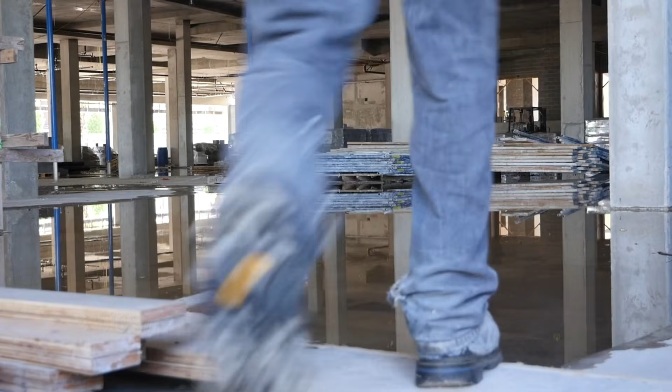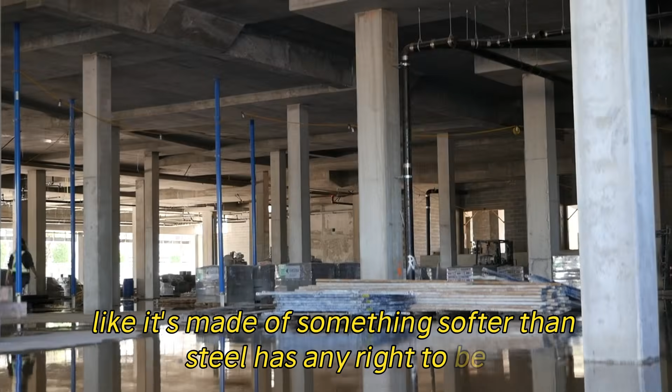8 a.m. A construction worker on the 21st floor looks up. A steel column, thick as a person, rated to hold thousands of tons, is bending sideways. Not cracking. Bending. Like it's made of something softer than steel has any right to be. He doesn't stay to find out what happens next.

Nobody does. Within the hour, a 37-story tower in the middle of Manhattan is empty. Then the block around it. Then the block after that. By nightfall, 7 other buildings are evacuated. A 5-block frozen zone is locked down. And the city's fire commissioner is standing in front of cameras, saying the building has been determined to be unstable.

This tower used to be Pfizer's global headquarters. By July 7, 2026, it was something else. A live test of exactly how much weight a piece of steel can silently absorb before it gives up.

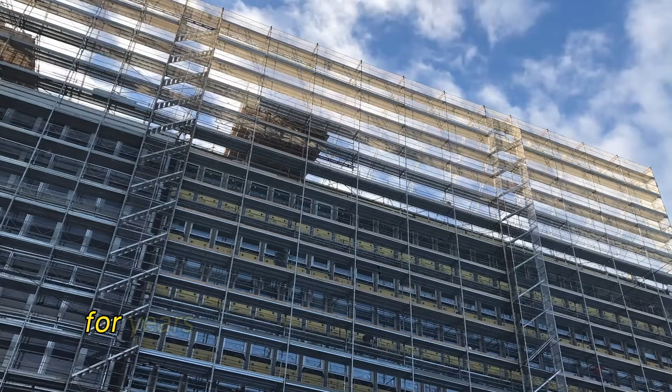235 East 42nd Street wasn't built to fail. It wasn't even built to be housing. Raised in 1960, designed in clean international style lines, it spent decades as office space, for years the corporate nerve center for Pfizer, until the company moved to the Spiral in Hudson Yards in 2022. Then the tower sat there.

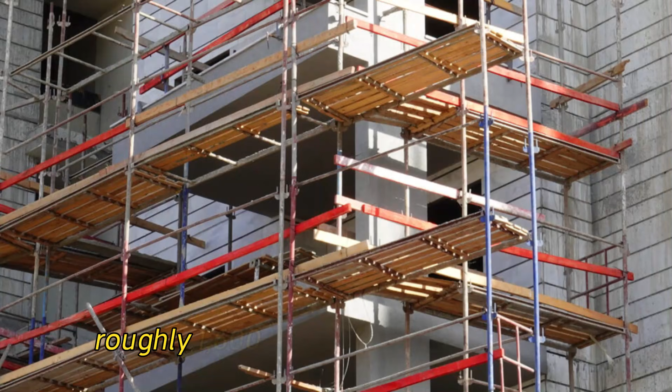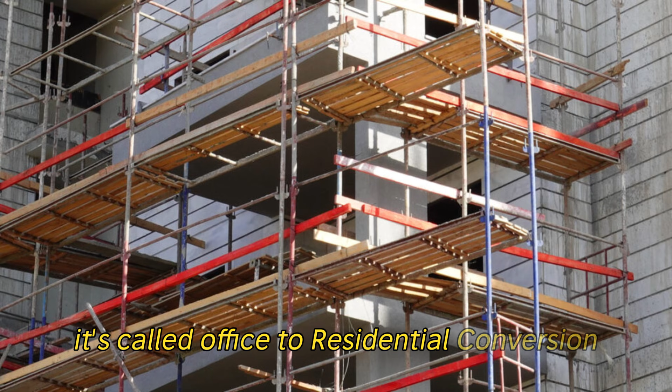And New York, sitting on a housing crisis it can't build its way out of fast enough, looked at an empty office block and saw something else. Roughly 1,600 luxury rental apartments, part of what its developer calls New York City's largest office-to-residential conversion to date. It's called office-to-residential conversion, and on paper, it's the win-win the city's been chasing. Old towers, new homes, problem solved. But a building doesn't care what's on paper. It only cares about the math.

To understand why this project mattered before it ever cracked a column, you have to understand the bet New York made. After 2020, the city was left holding tens of millions of square feet of empty office space. Remote work didn't just dent Manhattan's commercial real estate, it gutted entire blocks of it. Landlords sat on towers nobody wanted to lease. Meanwhile, on the other side of town, rents were climbing past what most working New Yorkers could reasonably afford.

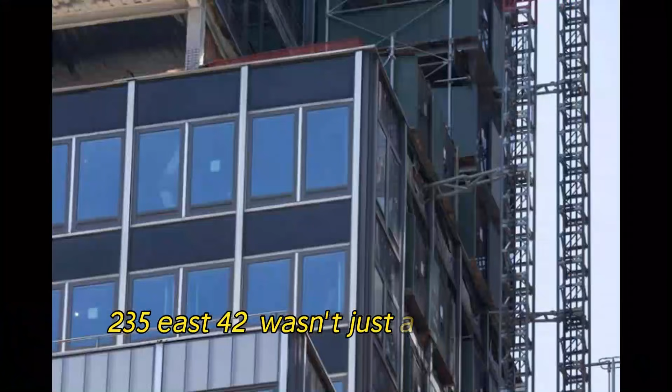City Hall's answer was office-to-residential conversion, at a scale nobody had really attempted before. Tax incentives were built specifically to make it happen. Hundreds of millions of dollars in exemptions offered to developers willing to gut old office towers and turn them into housing, some of it earmarked as affordable units. 235 East 42nd wasn't just a conversion project. It was positioned as the conversion project, the flagship, the proof that this policy could work at scale.

Developer Metro Loft didn't quietly convert an old office building. They assembled financing north of $1 billion, secured city tax breaks tied to affordable housing requirements, and set out to build what they called the largest office-to-residential conversion in American history. Which means when 2 columns bent on the 21st floor, it wasn't just one developer's bad Tuesday.

It was a stress test, literal and political, on the entire strategy New York is counting on to solve its housing crisis. If the city's flagship conversion project can buckle mid-construction, every other tower being eyed for the same treatment suddenly looks a little less certain. That's the pressure sitting underneath every statement made in the days that followed, because admitting a systemic problem doesn't just threaten one building. It threatens the model.

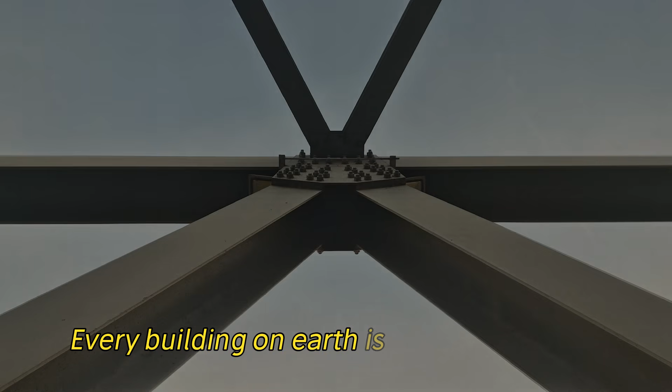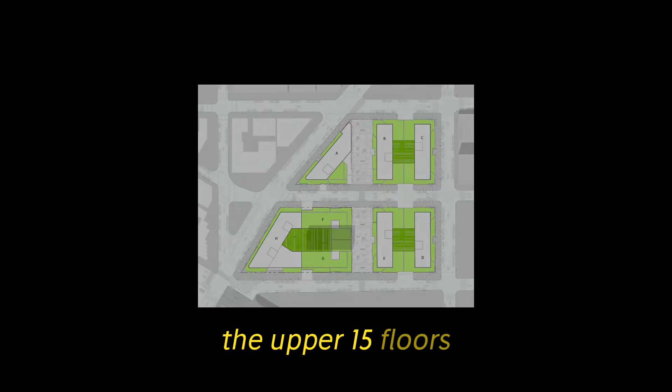Every building on Earth is designed around one number engineers rarely discuss publicly, because it's not meant to be tested: load capacity. The maximum weight a column, a beam, a floor can carry before it stops holding and starts failing. Office floors are light, open space, desks, foot traffic. Residential floors are heavier, and this conversion added something specific. The upper 15 floors, beginning on the 22nd floor, were being expanded outward, making them wider than the floors below.

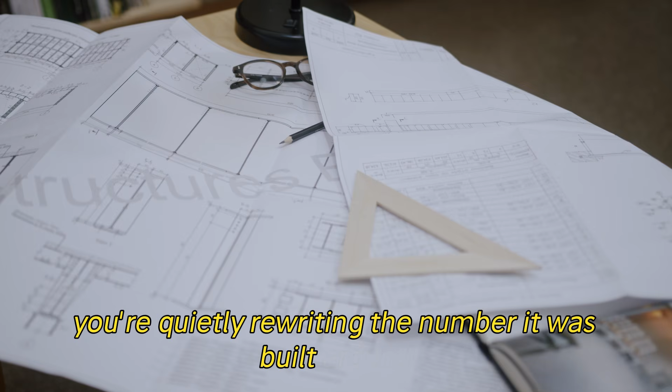More width, more weight, pressed down onto columns that were engineered for a lighter building doing a lighter job. Convert one building into another, and you're not just renovating. You're quietly rewriting the number it was built around, and hoping the structure never finds out.

At 235 East 42nd, the structure found out. Just before 8 a.m., Tuesday, July 7th, FDNY gets a call: bricks falling from the facade. What they find is worse. 2 structural columns on the 21st floor are buckling in real time. A buckled steel beam is visible from the street through a window. The building was sagging between the 21st and 26th floors.

Fire Chief John Esposito doesn't soften it. "The building has continued to move since we have been on scene. It does mean it is not yet stable." Within hours, the tower and 7 surrounding buildings are empty, including a nearby Hampton Inn. The city's fire commissioner puts the response at over 150 fire and EMS personnel on scene.

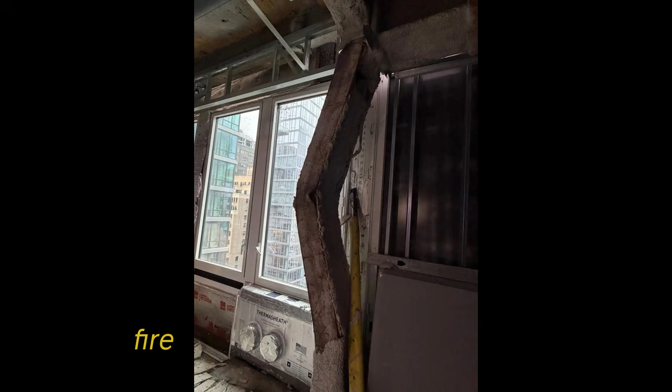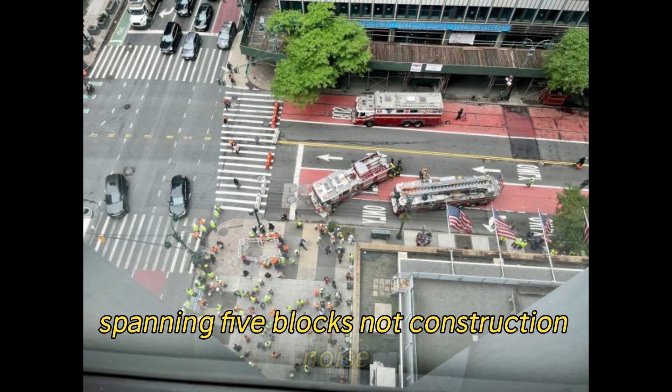Mayor Zohran Mamdani calls it an extremely serious situation and locks down a frozen zone spanning 5 blocks. Not construction noise. A building in the middle of Manhattan that might be starting to come down. To understand what those workers actually saw on the 21st floor, you need to understand how steel fails, because it doesn't fail the way people assume.

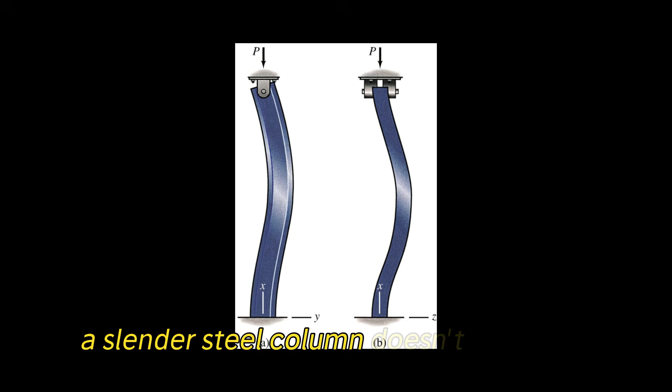Steel is strong under tension. Pull it and it resists enormously. But under compression, under a load pressing straight down, a slender steel column doesn't just crush. It buckles. Push down hard enough on something long and comparatively thin, and instead of crumbling, it bows sideways like a drinking straw bent between 2 fingers. Engineers call this failure mode exactly that, buckling.

It's one of the oldest, most well-understood failure mechanisms in structural engineering, and one of the most dangerous, because a column that's buckling is often still carrying enormous weight right up until the moment it isn't. That's why witnesses described the columns at 235 East 42nd as bending into the shape of a sideways V, rather than shattering or crumbling outright. That shape is the signature of a compression failure, a column being asked to carry more than its slenderness could handle, folding instead of holding.

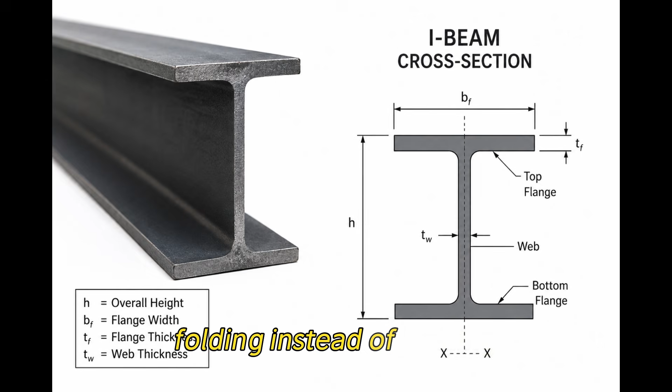And it explains why the danger wasn't over the moment the bending was spotted. A buckling column doesn't have a single point of failure, it has a process. It can keep deforming, slowly transferring its load onto neighboring columns, which were never designed to pick up the slack. That's the exact chain reaction that turns a 2-column problem into a 5-floor problem, and a 5-floor problem into a total collapse.

It's also why Fire Chief Esposito's team didn't just look at the 2 bent columns. They assessed the building floor by floor, because in a steel-framed high-rise, a compromised column doesn't fail alone forever. It fails, and then it starts asking the columns around it to fail too.

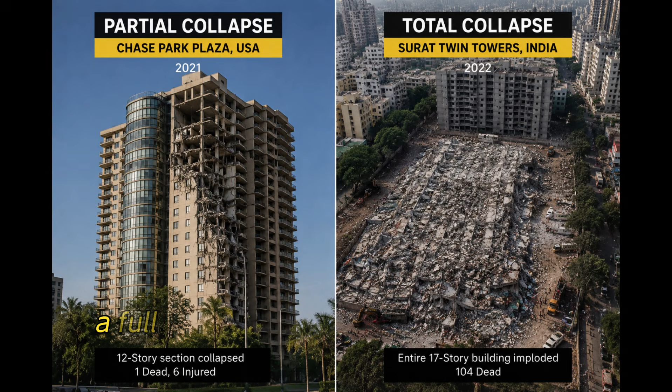Here's what almost nobody outside structural engineering understands. Not every collapse is the Hollywood version, a tower folding into the street. That's total collapse, and it's rare. Chief Esposito himself said a full collapse onto the street was less likely than the alternative. What officials were actually racing to prevent was a partial collapse, which could be internal, a handful of floors around the failing columns pancaking down onto the floors below.

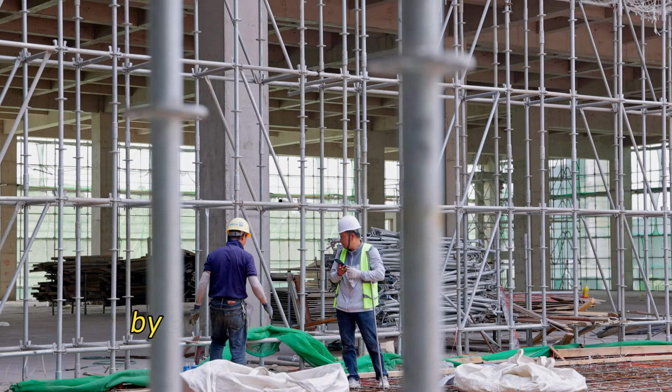Still catastrophic. Still potentially fatal. But a very different structural event. And the reason crews moved as fast as they did, because partial can become total if nothing intervenes in time. By afternoon, a 6-person team reached the 21st floor. By evening, crews were installing temporary shoring, jacks and new steel, stealing the load off the failing columns before they gave out completely.

The city's buildings commissioner said the words every engineer on site was hoping to be able to say: "We were able to get to the 21st floor to inspect the work that's being done and feel confident that the emergency work is stabilizing the situation." Overnight work held. By Wednesday, officials confirmed the building had not moved for several hours.

Not fixed, not resolved, just no longer moving. Most residents returned within a day; four buildings stayed under vacate orders. The investigation was only beginning.

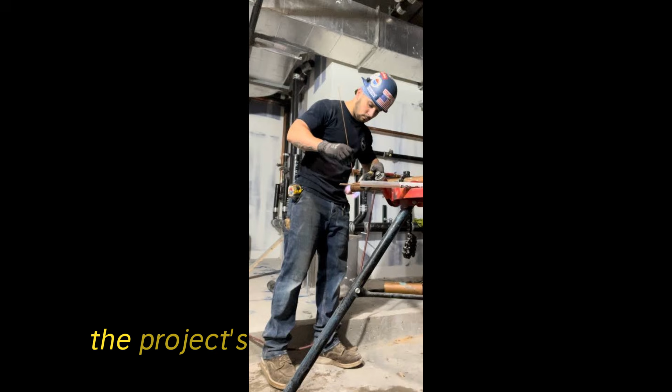Here's where the official version starts to split in two, and it splits along a fault line that matters. The project's developer, Nathan Berman, didn't just wave the incident off. He offered a specific mechanical theory. "This additional load that we put on those floors caused those 2 particular columns to collapse." He even posed the question himself, on the record: why those particular 2 columns and nothing else? The implication being it was a contained, explainable engineering event, not a systemic one.

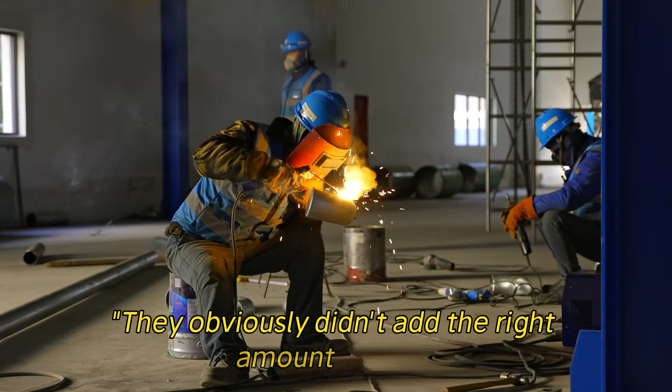But Cliff Johnson, a union representative for Steamfitters Local 638, workers installing fire protection inside the building, gave a very different answer to that exact question. "They obviously didn't add the right amount of steel. So, the north side of that building is crumbling. The I-beams are bending like cigarettes in there, which is super dangerous."

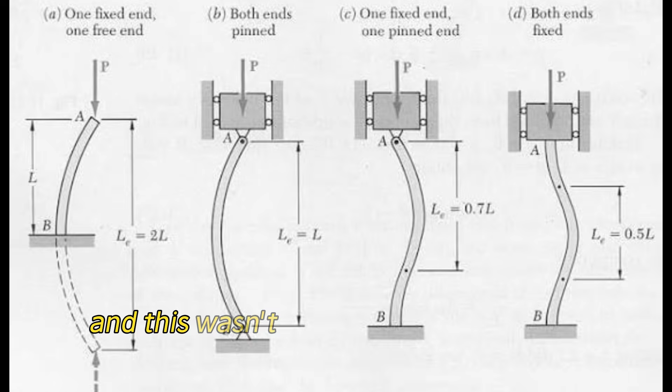A localized miscalculation, isolated to 2 columns. Or, a building that wasn't given enough steel to carry what was put on top of it, and 2 columns were just the first to show it. And this wasn't the first sign something was wrong. Before Tuesday, the site had logged 24 other complaints since the previous year. Falling material, a worker injury, debris dropping through 5 floors. None of it escalated to a formal violation.

There's also an active lawsuit. A construction worker who suffered a grave injury after what he was standing on gave way in September 2025, naming the developer and site owner as defendants, filed months before the columns buckled. None of that proves which explanation is right. The Department of Buildings said its own investigation was still ongoing at time of writing. But the man who owns the project and the man whose union installs safety systems inside it looked at the same 2 bent columns and came away with opposite explanations.

235 East 42nd isn't an isolated cautionary tale. It's a preview. New York currently has dozens of office-to-residential conversions either underway or approved. A wave of projects all making the same fundamental bet: that decades-old commercial towers, built for a completely different purpose, can safely carry the weight of the homes being stacked inside them. Some of those projects are smaller, simpler jobs. Some are attempting exactly what 235 East 42nd attempted, adding weight, adding width, adding entire floors worth of new load onto frames engineers calculated for a different era, a different use, a different number.

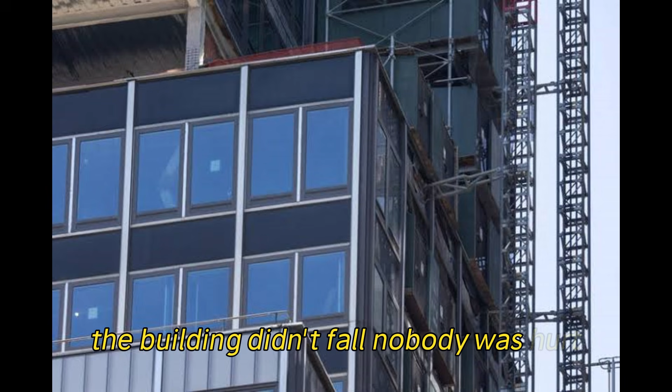The building didn't fall. Nobody was hurt. In a city of 8 million people, that's closer to luck than guarantee. For a few hours in July 2026, one of Manhattan's most recognizable towers stopped being an apartment project and became something else. A live answer to a question every engineer quietly asks about every old building being pushed into a new life. How much can it actually take?